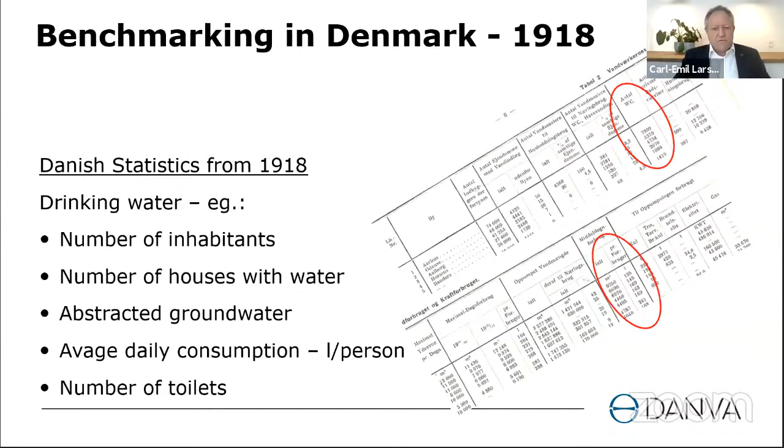We have been working with benchmarking or statistics for many years. The oldest book I have at my office is from 1918, you see a copy here. What we were interested in at that time, before I started, was number of inhabitants in the different cities, number of houses with water, abstracted groundwater, average daily consumption, and so on. But we have, of course, taken this much further since.

In 1998, the EU regulation on electricity started, and Danish energy utilities did the first pilot of benchmarking. DANVA at that time had 8 of our members start a project on benchmarking, because we were sure that if there were regulation on electricity, it was only a question of time before there would also be regulation on water.

Then in 2003, DANVA benchmarking on drinking water and wastewater made the second pilot, based on data from 2001. It was simple, using Excel sheets as a basis for this comparison. In 2004, we made the first portal and related database for the DANVA benchmarking, and we started already at that time to cooperate abroad with the Nordic countries, and we had a very strong cooperation with the Dutch Association on benchmarking, where we started the European benchmarking, which is still active and running.

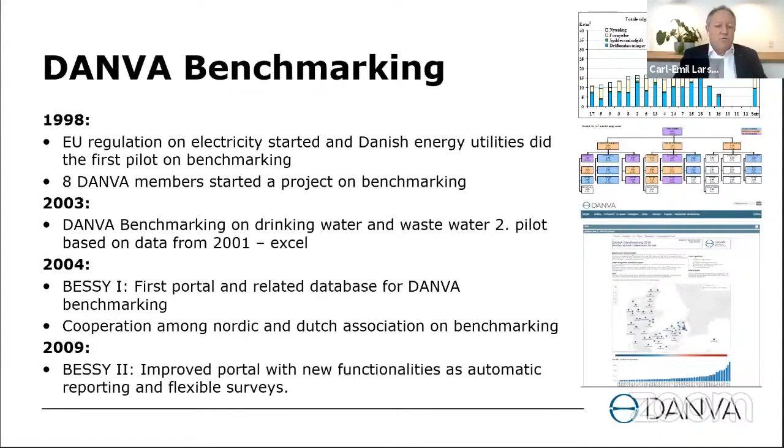Then in 2009, we made some improvements on the portal with new functionalities, and it is now improved all the time, whenever relevant.

In 2010, in relation to the regulation of the water sector, the government introduced compulsory benchmarking as well on economics. It was compulsory to attend. It started only in the first years on the operation activities, but in 2016 it also included all the investments, so this is now a total benchmarking on expenses.

And that is to require higher efficiency, economically. Then in 2018, a program on performance benchmarking was added, and it has been mandatory since 2018. That's on different environmental parameters, quality issues, and more recently also focus on energy consumption and production, and the carbon dioxide footprint is now also in place.

Related to the EU regulation, they have just agreed on the Green Deal to ensure to reduce the carbon dioxide footprint.

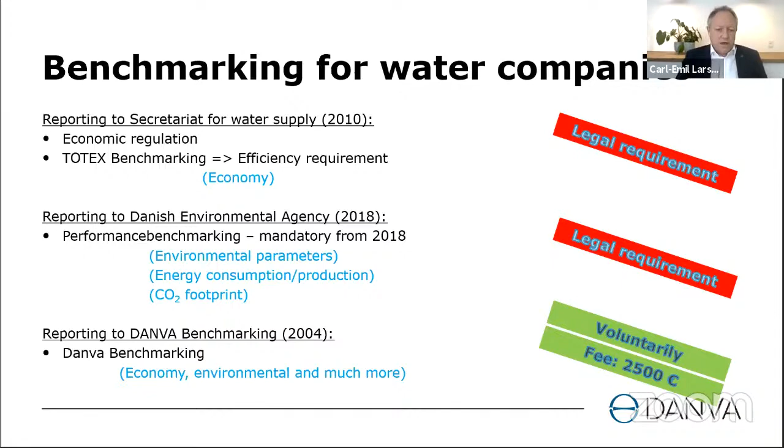And then there's the reporting to DANVA benchmark, which is voluntary. It has been working since 2004, and all our members who take part of this are paying us for doing this work, in addition to the membership fee.

So therefore, we started a bench learning workshop where utilities of the same size and with the same challenges went together and talked about how they compared their data, and almost every time there's one who is doing it a little bit better than the rest.

They analyzed how the best did the work, and during talks and during the workshop they could find the best practice among them. That means you could raise the efficiency for almost all the participants in this workshop.

So this is a very useful tool, I guess. When you have your data, you start benchmarking, you get knowledge on your sector, you start saving money because it comes quite easily, and then it results in raising the efficiency. I think that is what we see in all sectors, and in all countries, not only in the North European countries. I think if you don't do benchmark today, I'm sure you'll start within the next 10 years or something.

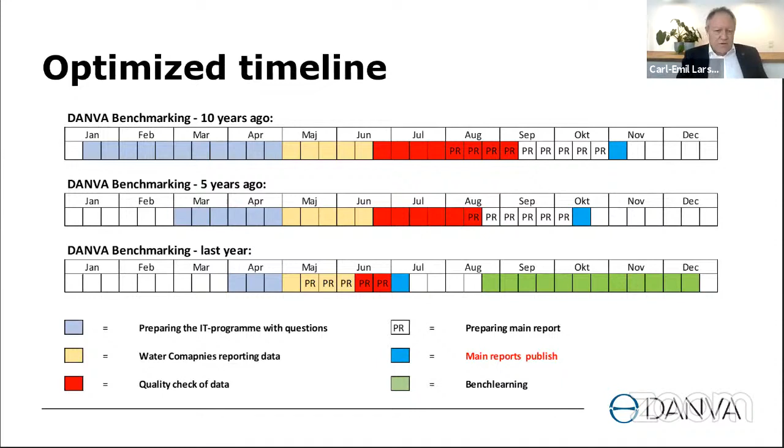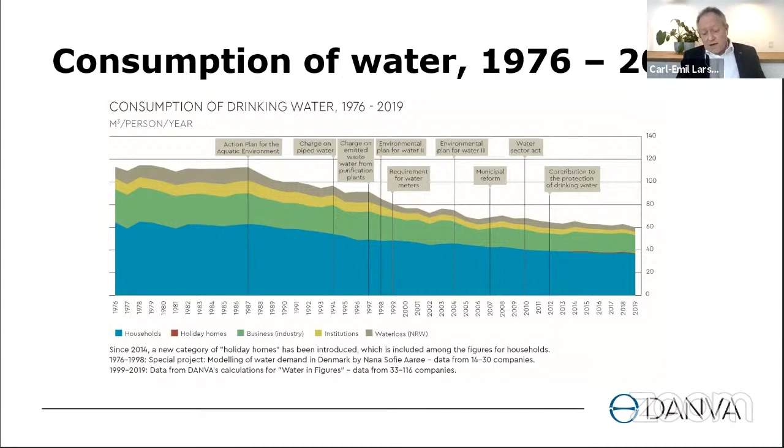One of the things I'll come back to a little bit later, but it's quite obvious that whenever you put some legislation in place, it has an effect. And I'm sure it's not only the Danes who follow what the government says - I guess most people do. Our consumption is now around 100 liters per day per inhabitant, and that is quite low.

That equals approximately 6,400 Turkish lira. So it's probably a high number compared to what you pay for water. I think Denmark has the second highest expense on water compared to global level, as a matter of fact.

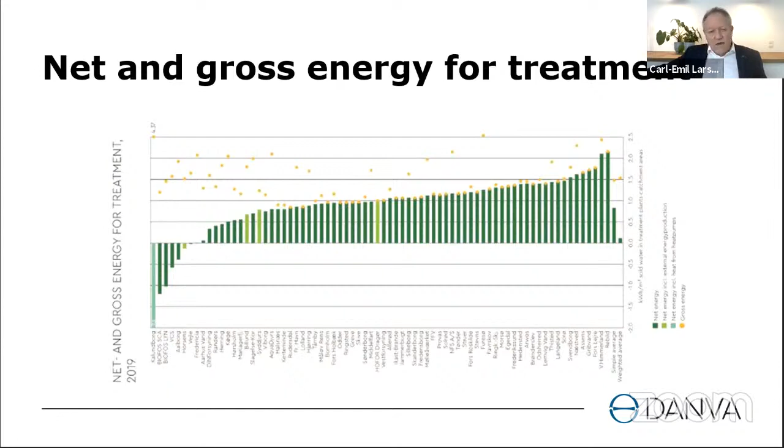They have set up targets so that the sector, step by step, will move in the direction they want, which is to be neutral on both energy and carbon dioxide.

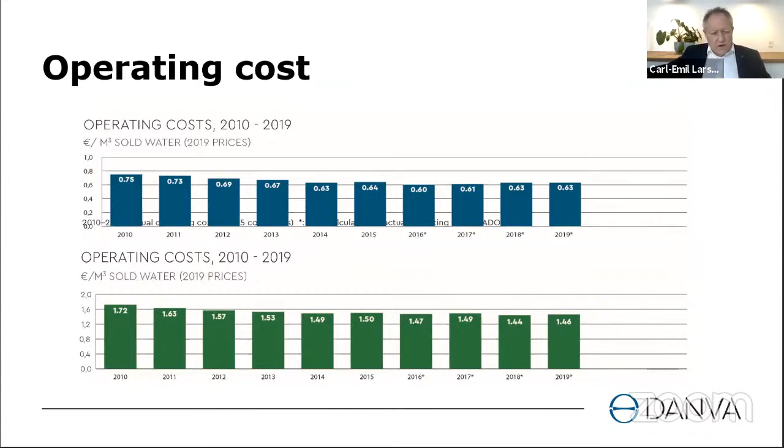And the same if you look at the bottom, that's the operating cost on wastewater. The efficiency here has also been raised a lot during this 10 year period.

And one of them is taking loans to pay for these investments. But it's fine as long as we can keep the tariffs low and even going down. So at the moment it's not a problem for any of the water companies.

Then I will tell you a little bit about the legislation. If I start with the European Union, we have a lot of different directives on water. I think there are three important ones. All this European legislation is framework legislation, so it's not detailed.

That is done in the national legislation afterwards. We have the Water Framework Directive, we have the Drinking Water Directive, where quality standards for drinking water are set, and then at the other end we have the Urban Wastewater Directive.

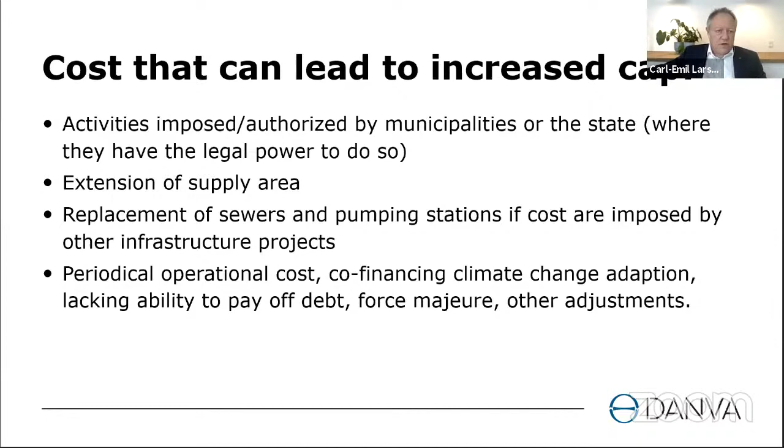The other thing I will mention is pricing in the Danish water sector, which might also be interesting for you. Looking at how the average price is composed, for an average family of 2.15 persons consuming 82.69 cubic meters, that was in 2018, it cost 69 Danish crowns. That equals 79 Turkish lira per cubic meter.

I agree with that, but we have full cost recovery and the polluter pays principle. These are two principles which are very central in national Danish legislation. For wastewater services, customers pay all the costs - investment, operational, administrative, environmental, regulatory, VAT and taxes. Everything is paid per cubic meter, and no tax grants go to the water sector. That is full cost recovery.

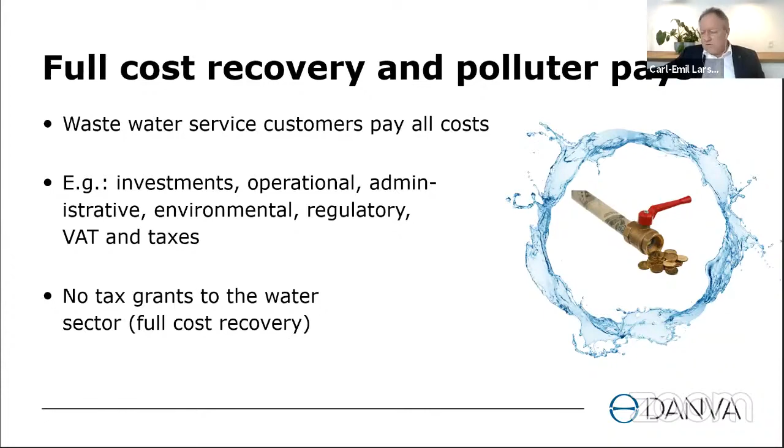It's based on metering, and it's mandatory by law that all customers - citizens, public and private enterprises and institutions - have individual drinking water meters in their properties. I'm sure you will hear a little bit more about that later. Also smart metering is now in place, I think around 60% of houses in Denmark, and in many countries abroad this has been implemented too.

The payment is calculated based on a standard price, multiplied by the number of cubic meters you consume. And also the payment for wastewater services is based on how much drinking water you consume.

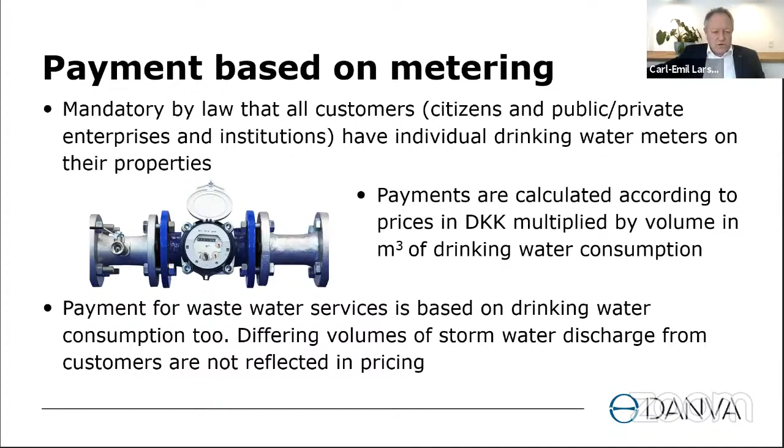On water and also on sales of goods and services generally, we add 25% VAT, and in addition wastewater is taxed with an environmental tax of about 0.75 lira per cubic meter. I think that's what's relevant in this slide.

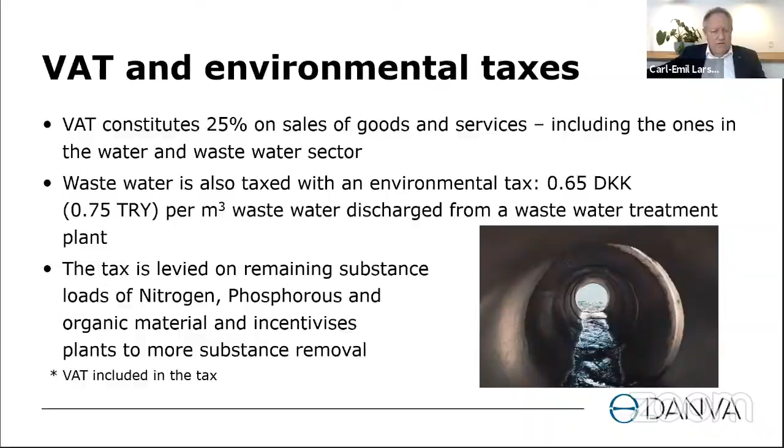Then I'll talk a little bit at the end about water losses. I'll quickly swipe through some of the slides. The water losses in Denmark, I guess I would call it, are quite low.

And I can tell you, it hasn't come by itself. All the utilities have been working very hard, and here we have used legislation, or rather a penalty, to get it as low as it is. In 1996, a penalty was introduced for water losses - if you are above 10%, you have to pay a fee to the government, and it's the water company and the consumers who pay this fee. So rather soon, it's cheaper to do some renewal and get your water loss below 10%.

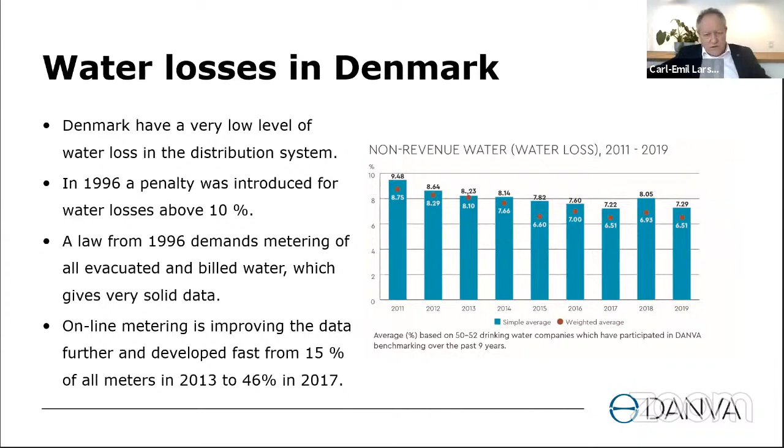At the same time, as I told you before, there was a demand on metering all evacuated and billed water, which gives us very solid data. And then online metering also is improved. In 2017, it was 46%, but I know it has risen a lot since.

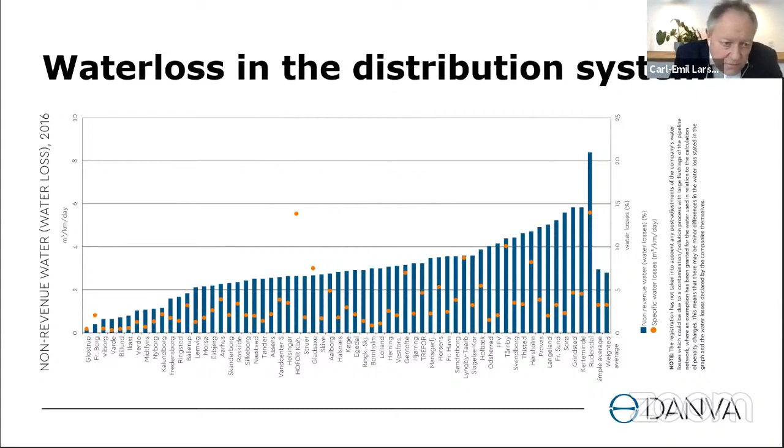Here you have a graph showing the difference between the different companies. You can see those to the right are above 10%, and they have to pay this fine to the government. There are two axes - we value it in two different ways. We can use the percentage above 10%, or the specific water loss, which is based on cubic meter per kilometer per day.

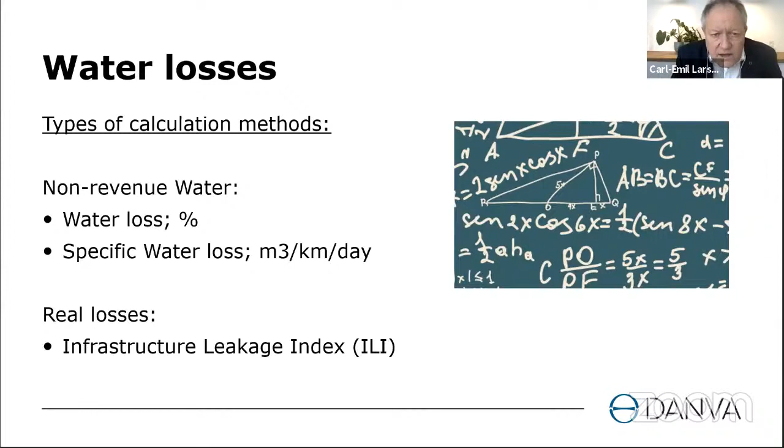Then there are real losses measured as infrastructure leakage index. I will go through this very fast because we are close to the time end. I can maybe use this one.

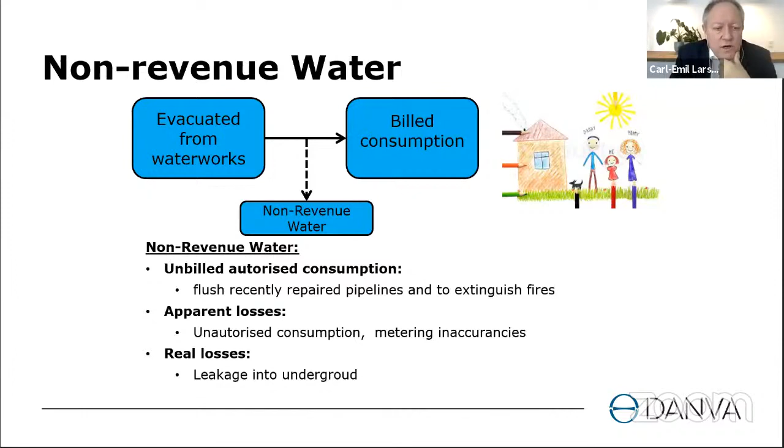What we evacuate from the waterworks and then what is billed to the consumers - the difference here is the revenue water, the non-revenue water. Non-revenue water consists of unbilled authorized consumption. It's what we can call apparent losses, that's unauthorized consumption, metering inaccuracies, and then real losses, meaning leakage into the underground.

I'll try to show the difference between the percentage and the specific loss measured by cubic meters per kilometer per day. Big water companies normally prefer water losses in percentage, and smaller ones normally like to measure or illustrate the water loss in cubic meter per kilometer per day. I'll make a tease of Flemming, who will come a little bit later.

For instance, in Aarhus, the second largest city in Denmark, they very often prefer percentage, and you can see that highlighted in dark blue. Why everyone wants to be number one is not so simple.

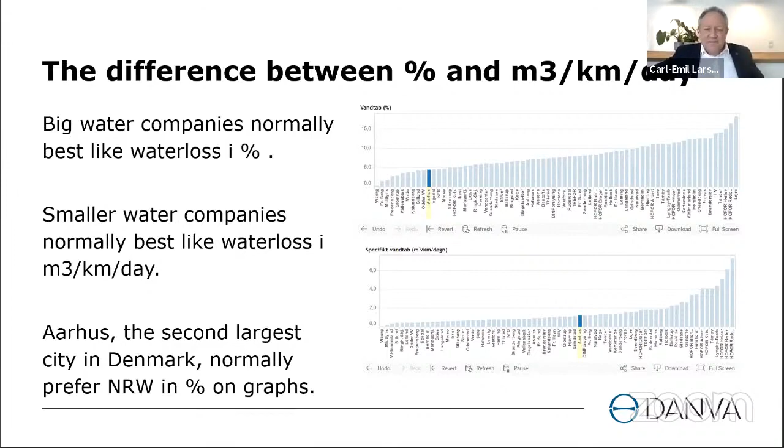It's difficult. But then we can also use the infrastructure leakage index, an international water loss performance indicator developed by the International Water Association, IWA. It compares the CARL, the actual water losses, with the unavoidable water losses, the UARL, and this fraction should be as close to one as possible. I will not go through these very theoretical things.

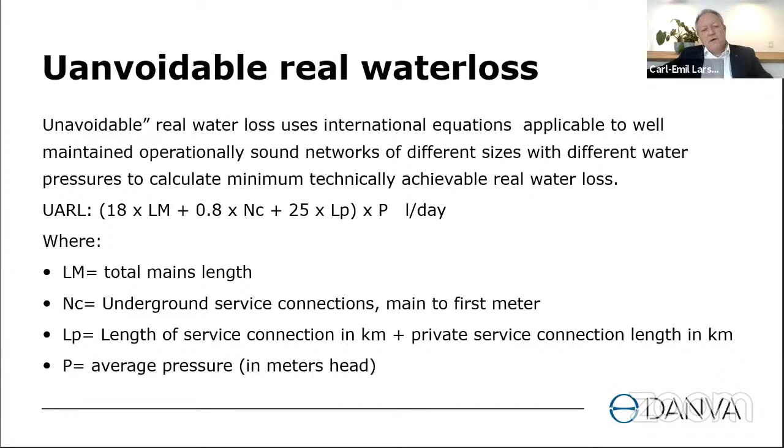I will just show you where all the Danish companies are - that's the blue at the bottom. You can see it is very low. A normal level is where all the dots are between the blue and the red line, but all the Danish companies attending this test have a very extreme low leakage. The same goes for the German and also for the Dutch companies - they are also very low in water losses.

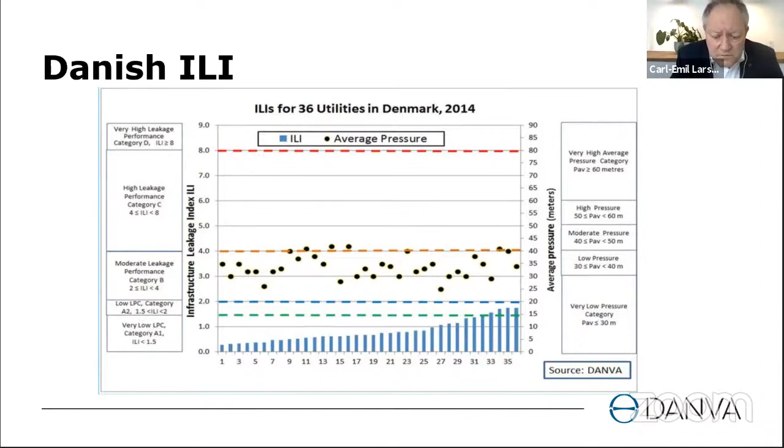If you want, you can access the Ministry of Environment in Denmark's homepage, and find a list of what has been done on water losses in my country.

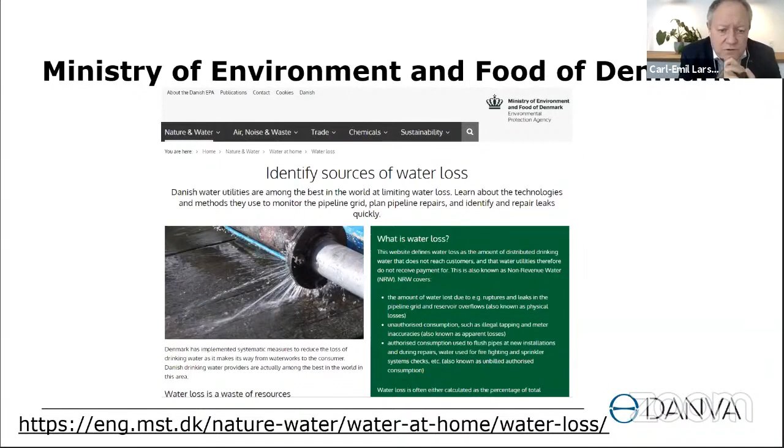Finally, I'll just invite you to Copenhagen. Denmark will host the next IWA World Water Congress. It was supposed to have been last year in October 2020, then we hoped to do it this year in May, but realistically it was not possible. So the new date is the 11th to the 15th of September 2022, and I hope to see a lot of you there. Thank you very much for your time.

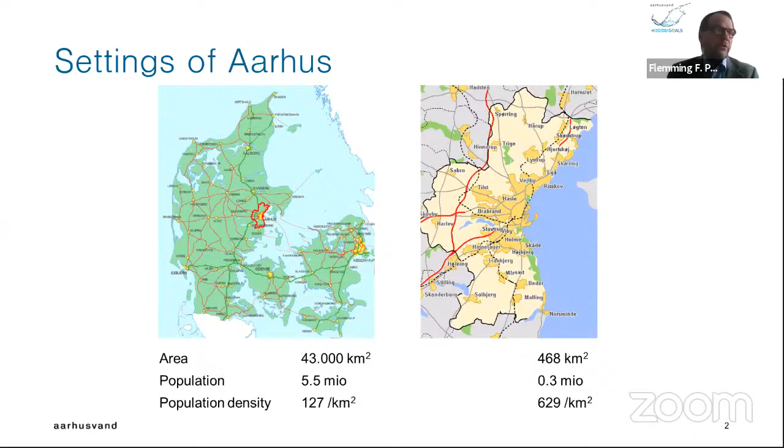In general, we consider our purpose as a utility in Aarhus as a very broad one, not only to serve the citizens of the municipality, but our purpose is to create health through the supply of clean water for the people and the planet. That is also one of the reasons that we are here today, because we would very much like to contribute globally to improve the water conditions around the world.

We will try to create a national platform for local and global solutions for a healthier water cycle, and we would like to offer and develop resource-efficient services throughout the entire water cycle.

Climate adaptation is a big issue for us. In Denmark, we are affected by climate adaptation due to more heavy rainfall and rising sea levels, so that is also one of the things that we work with as a utility. The environment is important for us, as well as supporting the Danish water sector in the export markets with the solutions that we have here in Denmark.

In general, we do not only look at drinking water, we look at the entire water cycle - from a drop of rainfall hitting the ground until it is provided as drinking water and treated as wastewater and discharged to the recipient. So we consider ourselves as operator of the entire water cycle.

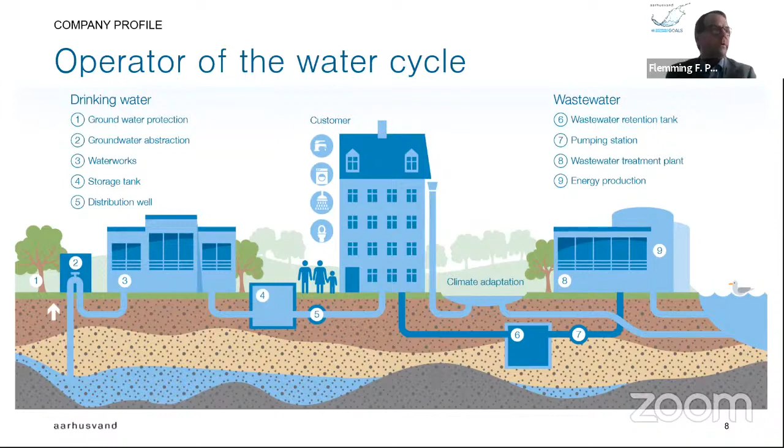Carl-Emil commented on the tariff system in Denmark, and here I'll show how it looks in our city. The consumer sees the price per cubic meter, calculated here as 55 Danish kroner per cubic meter consumed. This water tariff covers both drinking water supply and the discharge and treatment of sewage water. So every time you pay for 1 cubic meter, which accounts for most of Denmark, you pay both for the drinking water and the sewage water system. We also have a lot of taxes on the water price, which is also part of the tariff the consumer pays per cubic meter.

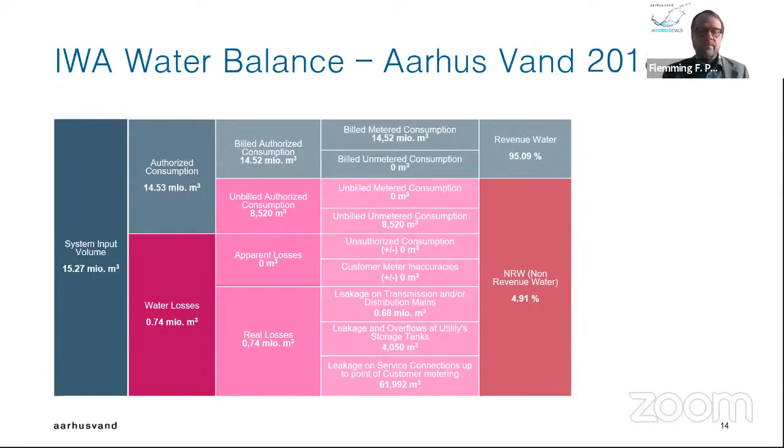When you work with water loss reduction, there's a number of issues you need to consider. In this presentation and the next, we'll look into some of these. My colleague Sally will talk about operation and maintenance and information data, and I will show you a little about asset management in the coming slides.

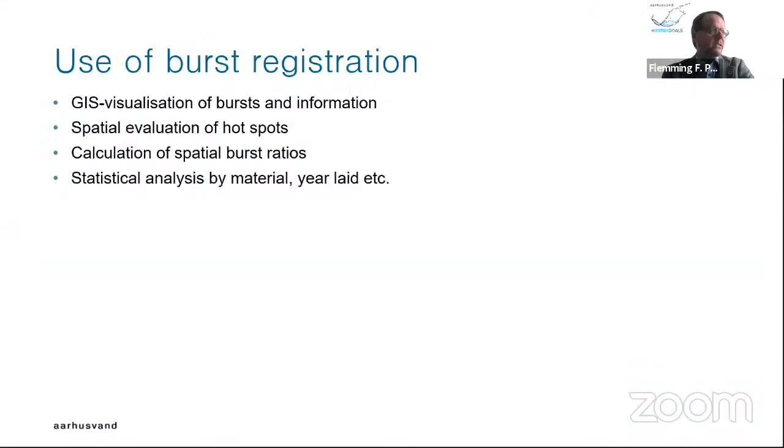One important thing for asset management of the pipeline system is having good data. In our case, we have a pipeline registration of the entire system, and we also register bursts in the pipeline system. So we know where we have the largest number of bursts and leaks. We have a history of that, and we can focus our efforts on reducing water loss in those parts of the city with the highest burst and leak ratio.

We also know it by the pipeline material. For instance, we know we have old cast iron pipes with quite high burst frequency. So one thing we're looking into for renewal of the system is replacing these old cast iron pipes, because that is where we have many of the leaks.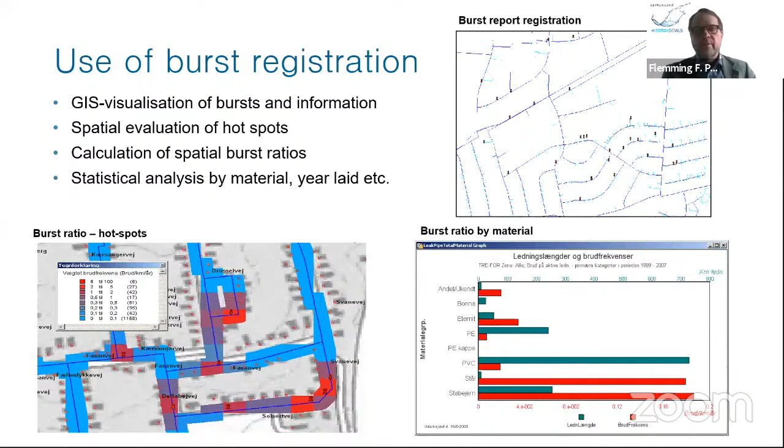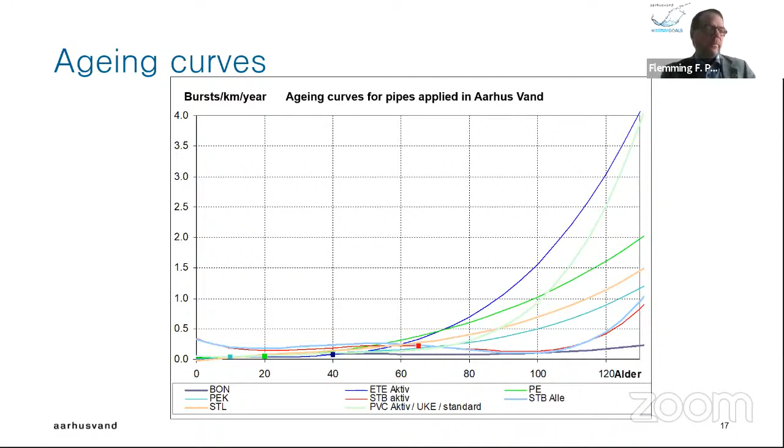We've been mapping different kinds of pipe material and how burst frequency increases as they get older. For instance, this blue line represents asbestos cement pipelines, and we see they have quite high burst frequency once they get older than 60 years. So we know that with that kind of pipeline material, we need to look into renewing it.

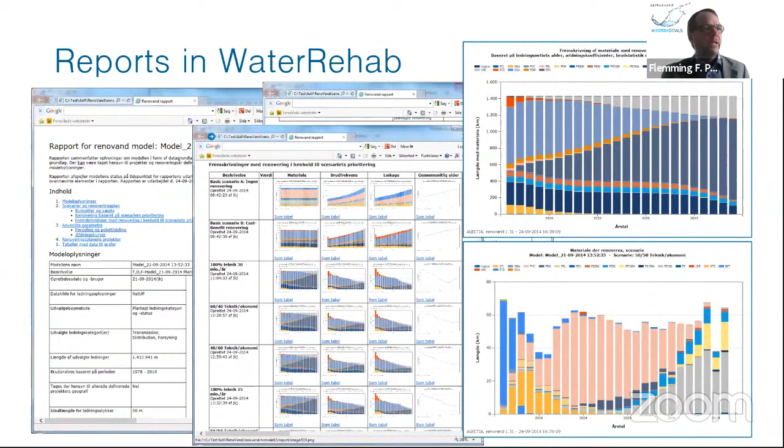We have a system in place for asset management of all these kinds of pipes, so we can generate reports telling us when a certain part of the pipeline system needs to be rehabilitated or renovated. There are a number of different views of this. Here is one view showing in which year expected rehabilitation of a certain part of the system should be done, so we can plan many years ahead where to make the most efficient investments.

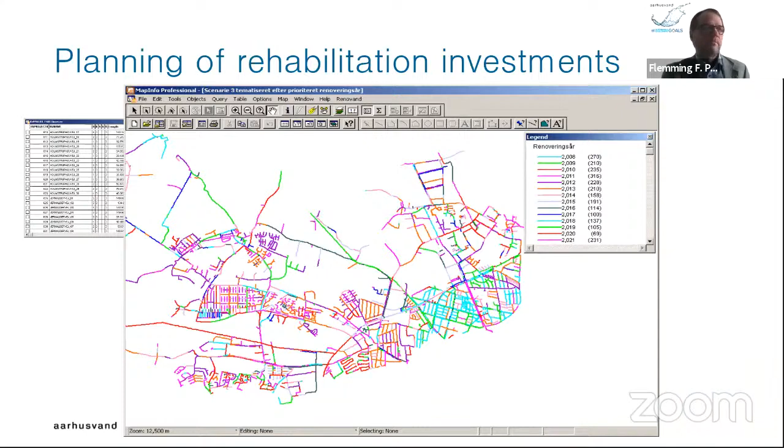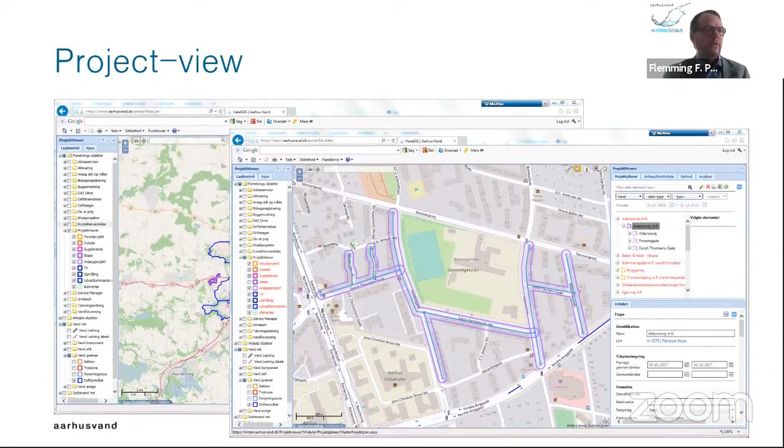There are also different maps for prioritization based on the kinds of materials in the pipeline system, so we can see that if we do nothing, we can expect a higher leakage rate for certain pipeline materials. We also have a project view, so we know in which parts of the city we have ongoing rehabilitation projects, making it easy to communicate to colleagues what rehabilitation projects we have going on in our utility.

So that was my presentation. Thank you for your attention.

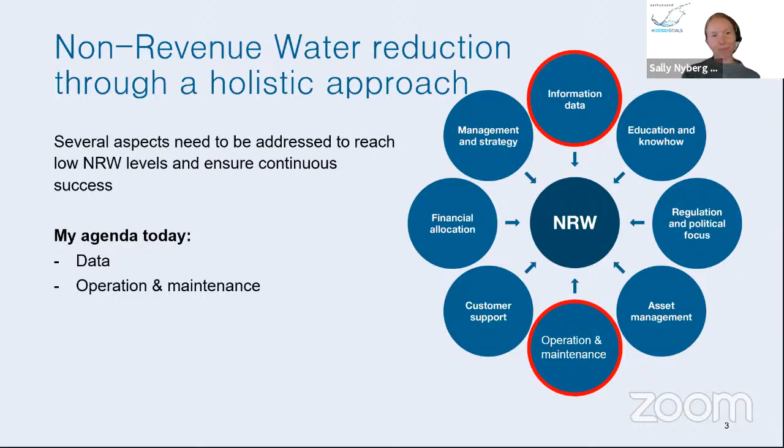One of the key pieces of data we need is the SCADA data from our waterworks - how much water we produce, how much water leaves the waterworks, and also the storage tanks. As Flemming told you, we have storage tanks both at waterworks and around in the systems, so information from those points is very important.

We've also talked about water consumption. The most important parts of the calculation are how much water we give the consumers, what is spent at the consumers, and what's left is the water loss, the non-revenue water. Right now we have a strategy in Aarhus Vand to change our manually read water meters into smart meters over the next years.

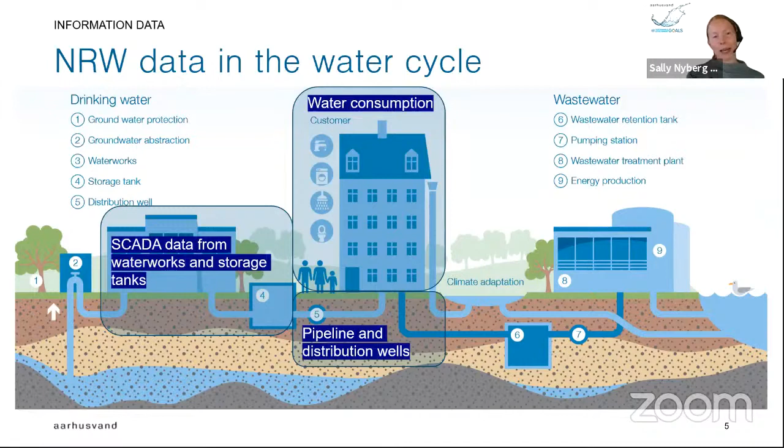We have something called distribution wells, and I'll introduce what I mean by that. These are measuring points around our pipeline system, measuring water going into smaller parts of the network called DMAs. So important data here is the SCADA data from the DMAs.

We also have that structure in Aarhus Vand where we have bigger zones - the big DMAs - which are then divided into sections, sub-districts inside the big DMA. We have a strategy about DMAs, and right now we're having more and more of them.

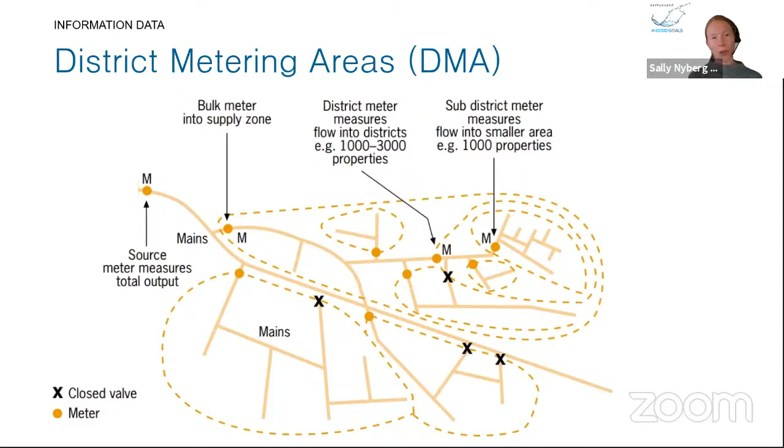I'll show you a picture of a measuring point going into a DMA - this is what we call the well. Here we have a picture where the top is a manhole, and inside the box we have the measurements.

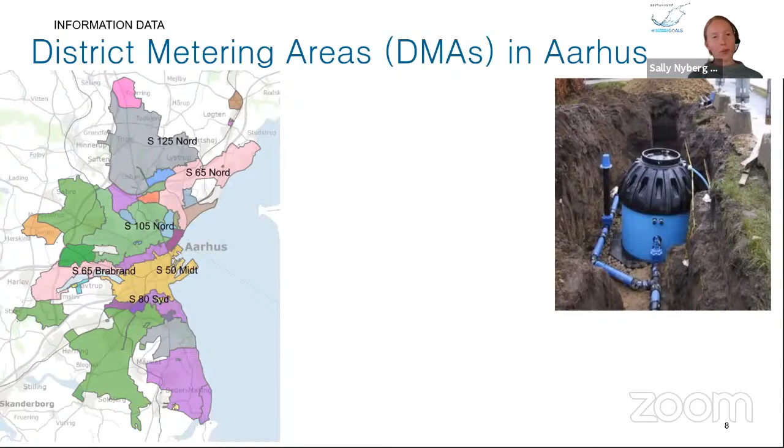Right now this is the picture of sections in Aarhus Vand where we can calculate water going into the area, and also water leaving the area if that's the case. In some years the plan is that it will look like this - an ongoing process where more and more smaller parts of Aarhus will be able to calculate exactly what water comes into the area.

So what do we calculate at these measuring points? We calculate flow, pressure, and temperature. There are also other features and components - for instance, we can take water samples and so on. It's very important for our daily operation that we have these measuring points with online information coming into our SCADA system all the time.

Another important data type, talking of non-revenue water, is pipeline registration. This is important because we need to know information about the pipelines - we have a lot of information decided in Denmark that we want to know about our pipelines. Another aspect is to investigate how precise our data is. For instance, when doing leakage monitoring, it's necessary to know how much I can trust the data - is it plus minus 20 centimeters on the map, or plus minus 5 meters? It's important when locating the exact leakage, so that's something to be taken into consideration.

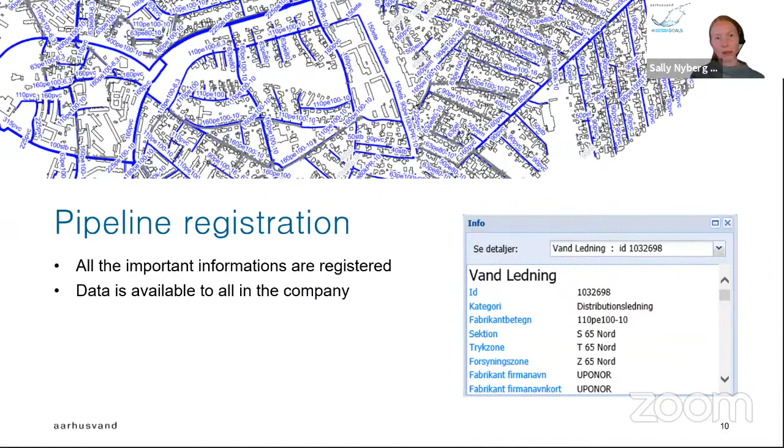The last thing about data I will share is that in Aarhus Vand we have developed a software where we can visualize different kinds of data, and we use this software to have some kind of data flow. I'll show you a print screen from the software. The idea is that everybody in Aarhus Vand has access to it, including access in the field. So here on the top you see a map, and on the map you can see the pipeline registration.

You can also see work orders if they are here, so on the right there is a specification of the work order - of course it's in Danish. But the idea is that we have this tool where everybody in the company can see the same information.

And on the bottom you can see two pictures, because the field workers can directly take pictures. They can also make small videos and audio calls, so they can put information very quickly into this program, the software, and then we know in the office what is happening. My job is very much based on analyzing what is happening, what has happened for the last month, and I also use the same tool.

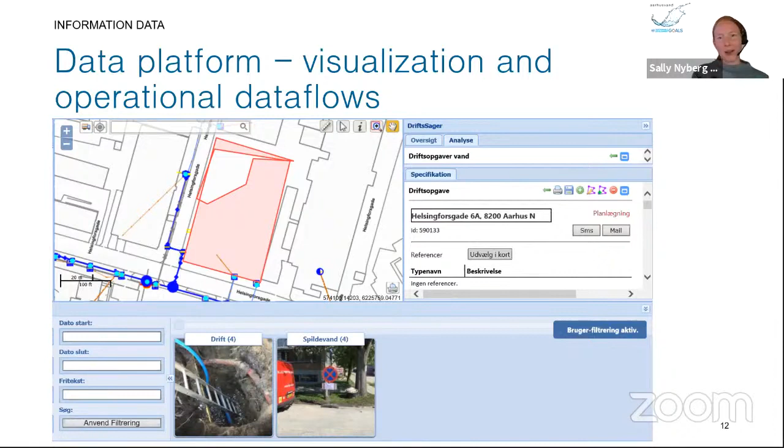Also, one of the last slides Flemming had was that the planning and the renewal projects of the pipeline are also visible in the same platform. This was just to show you how it is very efficient for us to collect data and see it all together. For the data flow, I'll go into more detail with the work order flow for the next part of my presentation.

It will be about operation and maintenance. As I told you in the beginning, we have this group of people that I'm leading, where we are both focusing on monitoring water loss and also leakage detection. The monitoring part and the leakage detection are linked very much together. But before I go into detail with those two parts, I would like to show you how we are organized, and how a normal work order flows between the different parts.

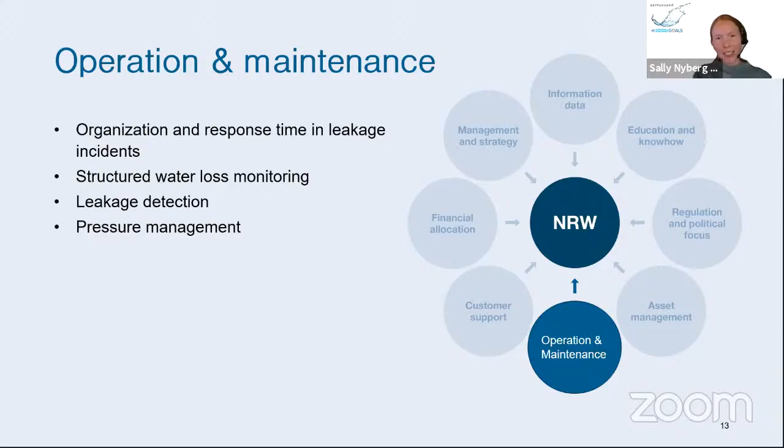So just to introduce this part, I will repeat our structure here in Aarhus Vand. I'll show you a line called operation, where I am, where my role is, and also service will have a very essential part here. I'll also show a line at the bottom called planning - that is the part of Aarhus Vand where the plans, the last thing Flemming showed you, will be carried out. They are very eager to have the right information from us, so that's why they are also part of the flow of the data.

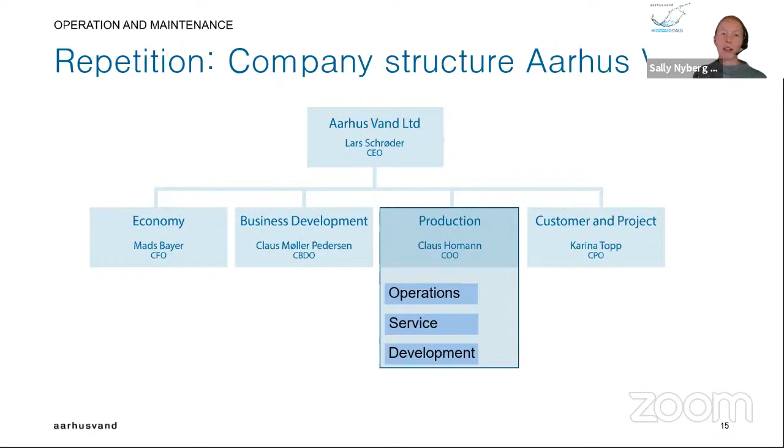I'll go into detail with this part as well, the workflows. As you can see on the top, I have put operation, and this is where my role is. This is a workflow from a typical leakage or burst - how does the data from this incident go through our organization? It starts in operation, where it might be a leakage I discover in our monitoring software. We have a software called KeyZones that I'm looking into almost daily. It can also begin with a call from a customer or other that finds a spot in our area with water on the ground - then the call will also come into operation in our team.

Then the next step will be to make a work order. The work order will go from our team into our service team, where the field workers will receive it and go out and locate the burst, using one of the methods I'm showing you in some slides. When they have fulfilled the job in the work order, there might be a false alarm closing it, saying there is no leakage, but often they actually find a burst or a leak, and then it would make a work order number two, going directly into another part of service where they're doing the pipe repair, also going down to our constructor - we have a constructor that does the digging, another company we work together with in partnership.

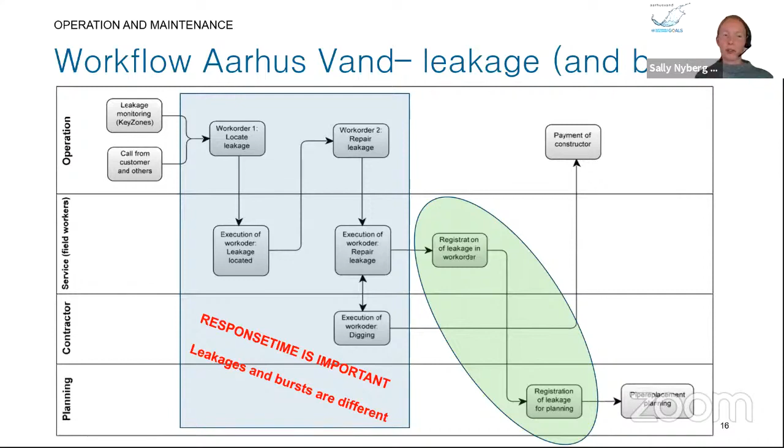The end of the workflow is about registration of the incident, registration of the exact burst, the material, the water flow out of the burst and so on. This goes directly to planning, because they use it for pipe replacement planning. I'm about to start a project this year to look into this part of the workflow, to optimize it and make it smoother and less manual than it is now. So we're always looking into where we can make it better.

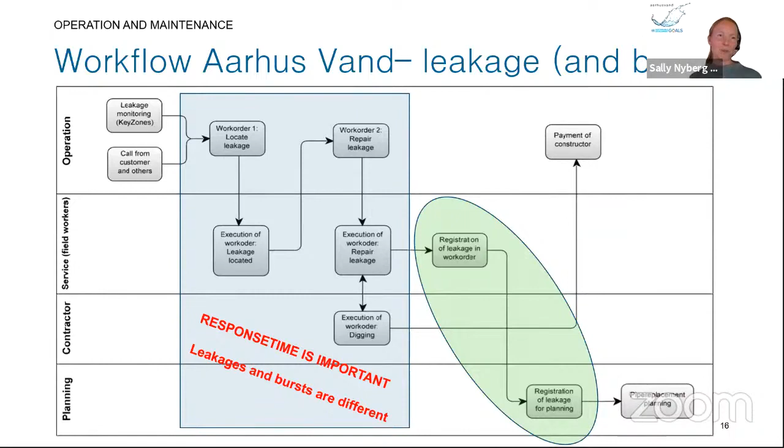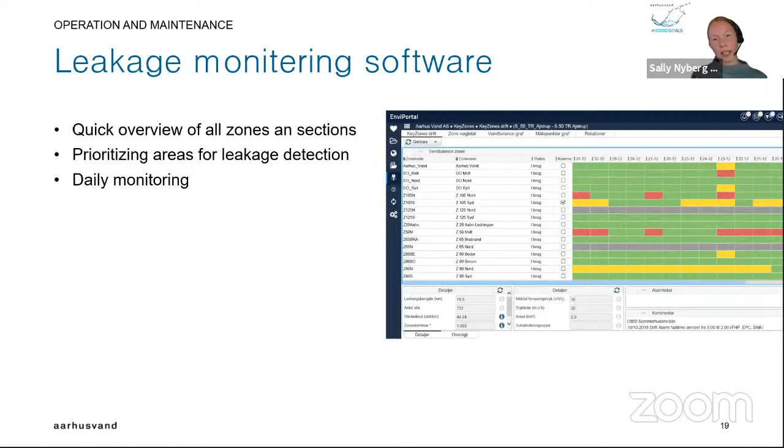We then decided to invest in monitoring software. The idea is that while we could see the bursts and changes directly from our SCADA system, the monitoring software gives us a quicker overview of our zones and sections, the DMAs. There are many different ones on the market, but here the idea is that the colors give us an idea of where to look. Green indicates everything is fine, red and yellow indicate we should look into it. It's the same principle as directly in our SCADA system, where we have a change in flow curves.

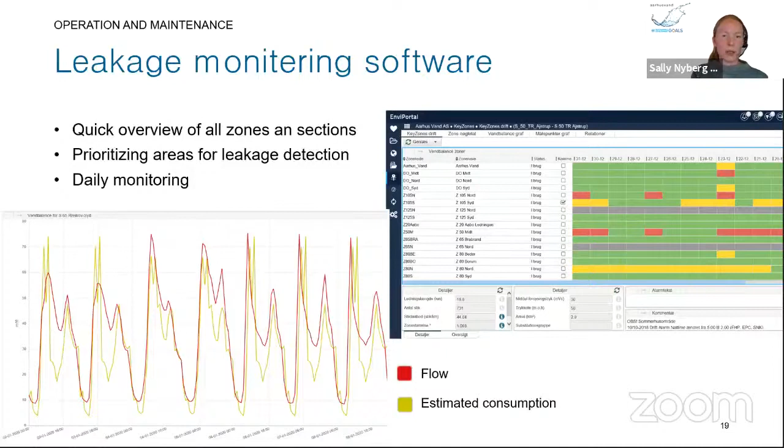You can see here the red one is flow, and the yellow is estimated consumption. Yes, leakage detection.

It's used the way that we divide a small area, close the inlet to the area, and then provide water from this tank into the area. Then we can measure exactly how much water is spent in the area. The idea is that the area should be small enough that we come down to zero consumption once in a while, meaning there are no leakages.

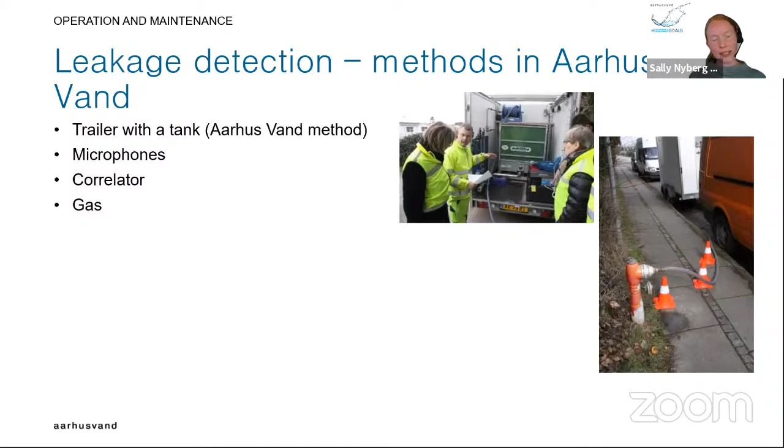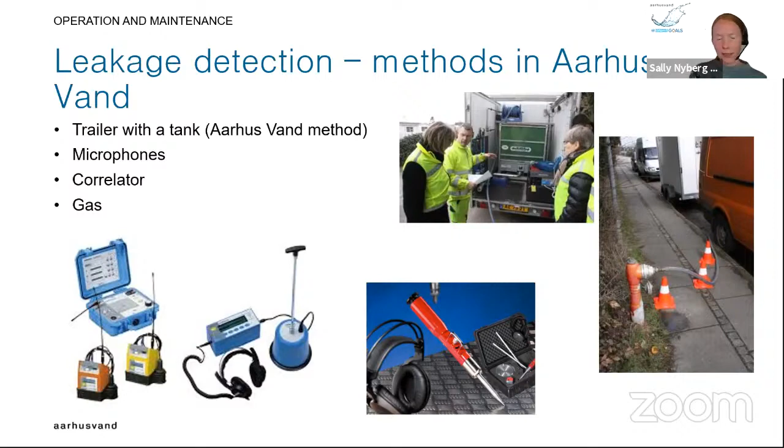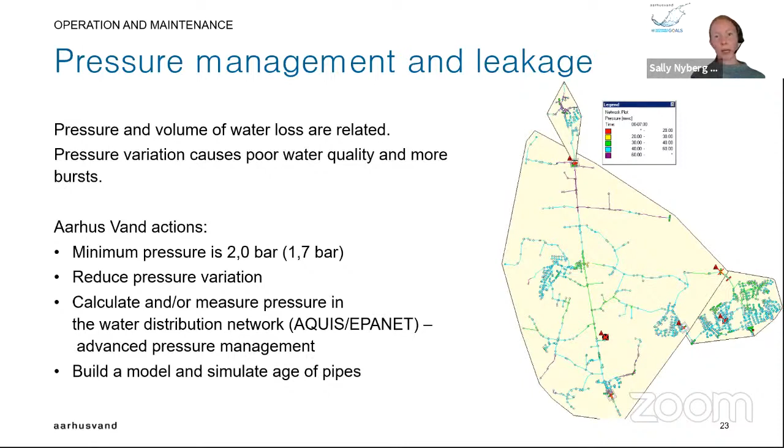That was the most important part I think I've chosen. So thank you for listening, and of course any questions, just let me know.

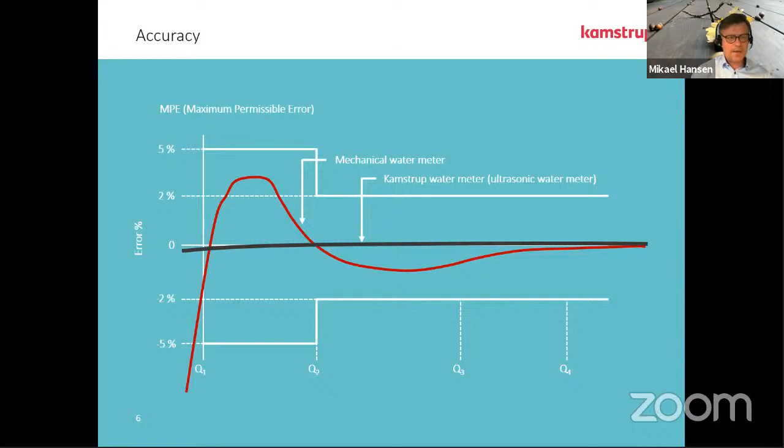When we speak about smart metering, you hear it all the time. You can say smart metering is the meter itself in a more or less digital version. We've seen meters based on traditional technology with a communication unit added. Kamstrup has a full digital meter, ultrasonic based, with data communication from there. So there are various levels of smartness, so to speak.

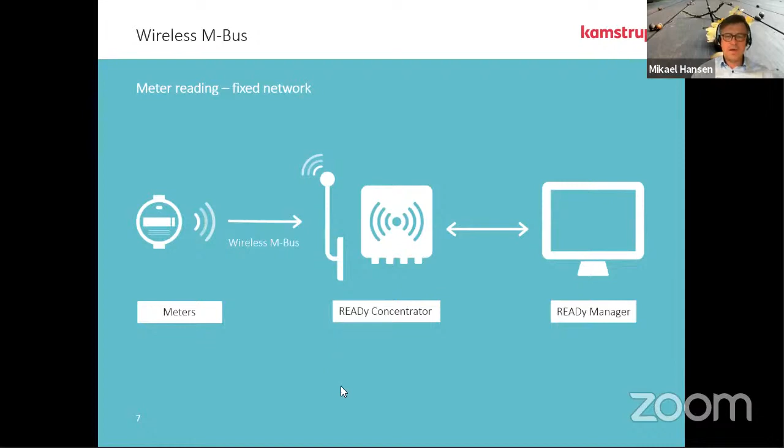I would like to introduce you to a specific project we did. We started 4 years back, and it was one of the first full-scale, full digital systems we supplied in Denmark, for a client called Herning Vand, a medium-sized utility. The project involved supply of 17,000 meters, primarily for residential applications. It was a fixed network, including the data communication infrastructure. Water balance software was part of it, and also project management was part of the supply scope. So it was a full turnkey project that was part of the partnership.

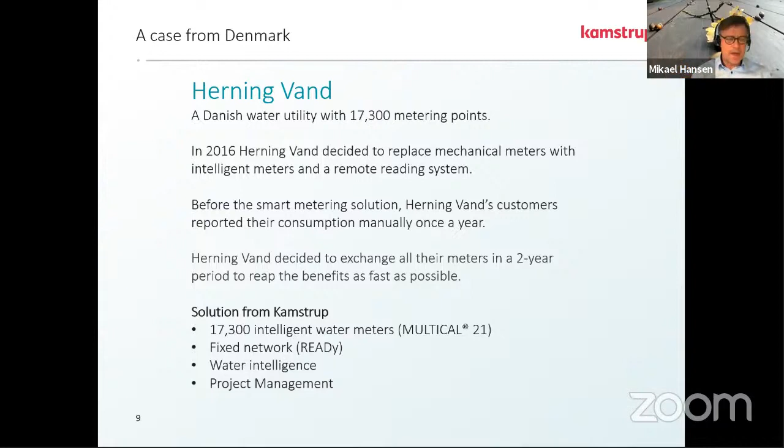Having been in operation for 2 years, the utility was looking back at what gains they got out of it money-wise. They were able to say that the savings were 340,000 euros, plus an initial savings of 142,000 euros. Maybe more important, it gives a hint of 6 years return on investment.

The values created include increased revenue because of better accuracy, increased service towards the customers, simply because more information could be conveyed to the consumer, so a more positive dialogue with the consumers. Also optimization on the administration as well as assets management.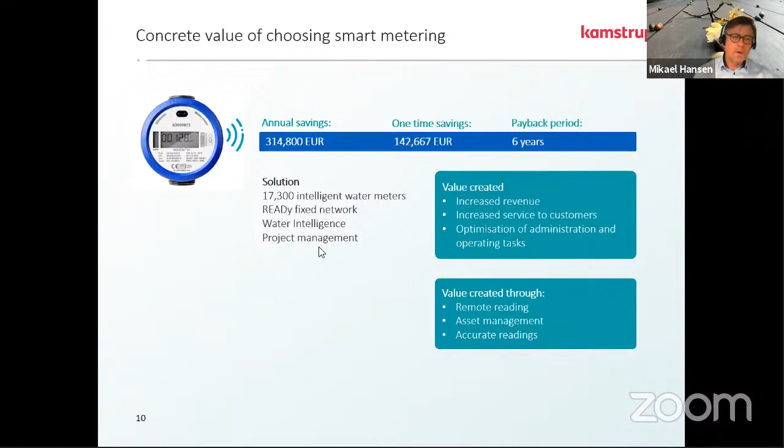To go a bit deeper, one aspect was the remote reading itself, the physical action or handling of manual reads. Reading in Denmark is done, I don't think anywhere else in the world, by a self-reading process. But even doing it like that, there are still tasks involved which are costly. In addition, one thing seen very positively at the utility was that the quality of the data accelerated, allowing them not to spend time cleaning up data, but to do more key-oriented work.

So the savings out of the reads itself were 64,000 euros, and the improvement of data quality helped them save another 38,000. So 102,000 euros on a yearly basis.

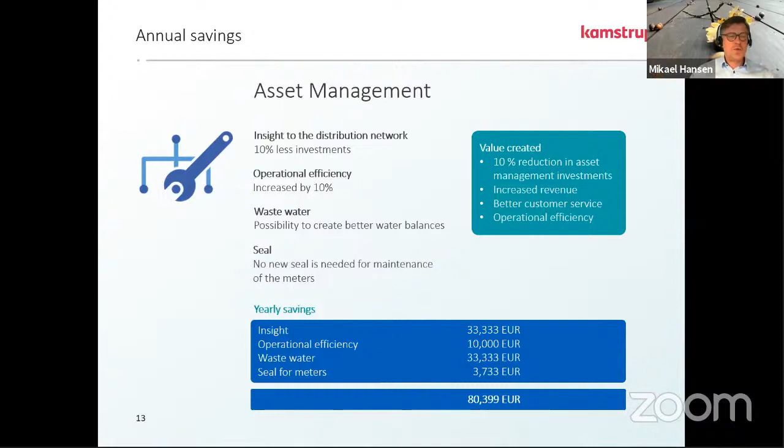Similarly, another 10% gain was achieved on the operational side, in daily operation, with less pipe issues and more efficient energy use. Accurate readings was one factor giving a relatively high number.

And finally, a one-time saving was on the fraud side. When the smart metering solution was put in force, a number of frauds was detected, whether people handling around with the meters, or even bypass installations. People are always very creative when it comes to fraud, but at least they were able to find value of 100,000 euros in frauds that they could stop, and hopefully it won't happen again.

So these were all gains for the benefit of the utility. On top of that, there are also benefits for the consumer.

One very specific thing is frost, meters that were damaged due to frost, which can still happen today. They got an alarm because the meter doesn't react any longer, giving a clear signal something is happening there, so they were able to repair it in due time before losing water.

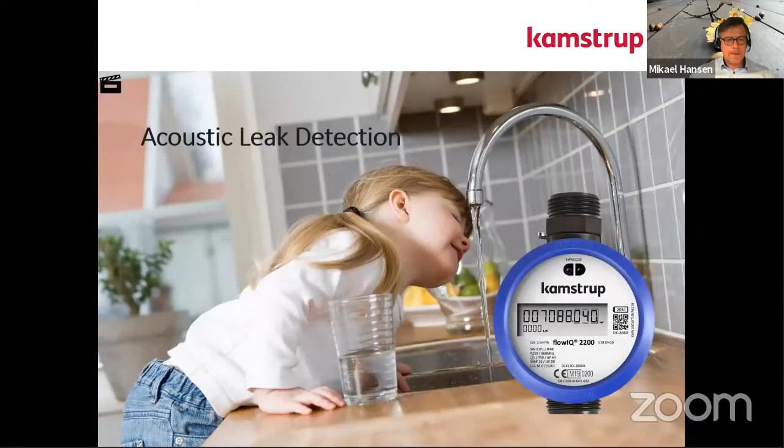A little bit of inspiration here. So what we were thinking about was taking a view on a typical distribution or split of leakage seen in a water utility, and these numbers here would represent a typical North European picture. It might be different in Turkey, and definitely also in your part of the world. It's very individual from area to area, from utility size, etc. So just take it as an inspiration.

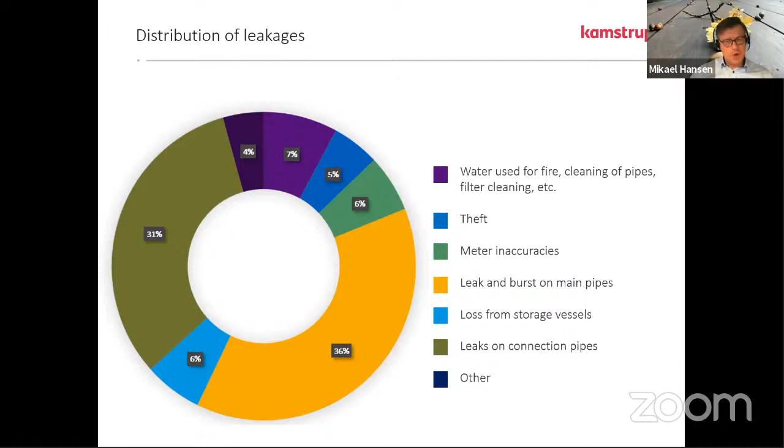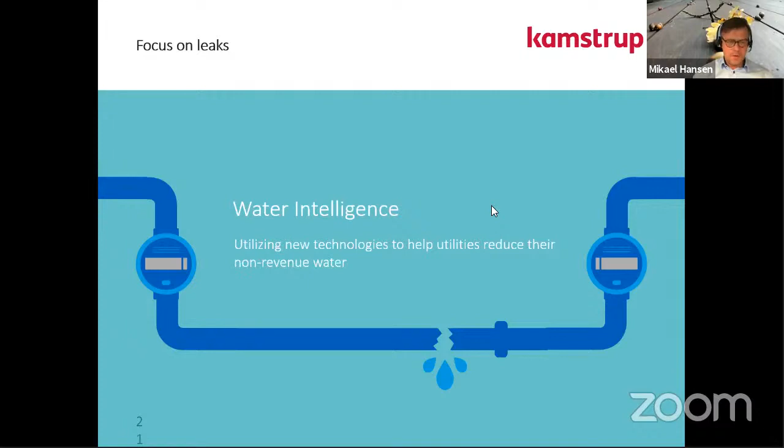But we realized that 31% of the leakage, or the non-revenue water if you like, is to be found in the connection pipe - from the distribution network into the meter installation, or the connection to the consumer. So we thought that would be worthwhile having a look at. If we were able to detect or get a message on an irregularity in the connection pipe, that would have huge value for the utility.

So what we did, we took our existing meter and we added a noise sensor, or noise sensing functionality, into the meter. Basically, the meter is busy primarily with metering, but when it is not doing metering, then it can do the noise signalizing. So we put that into the meter.

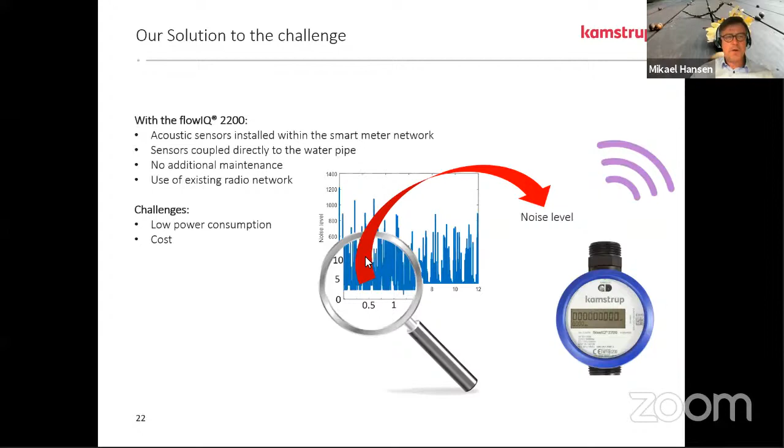We made a software, an algorithm, which is the way to understand the data from the meter and illustrate to the operator the situation. It's a bit like the data doesn't have value itself, but at the moment where you're able to understand it and present it by help of algorithms and presentation material, it becomes valuable, and action can be taken out of that.

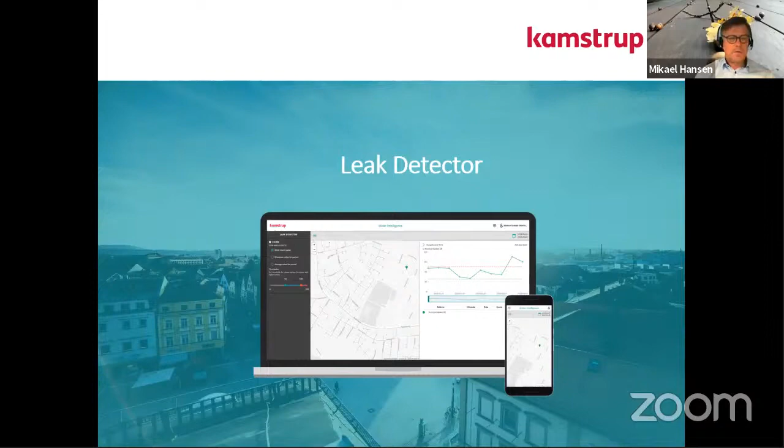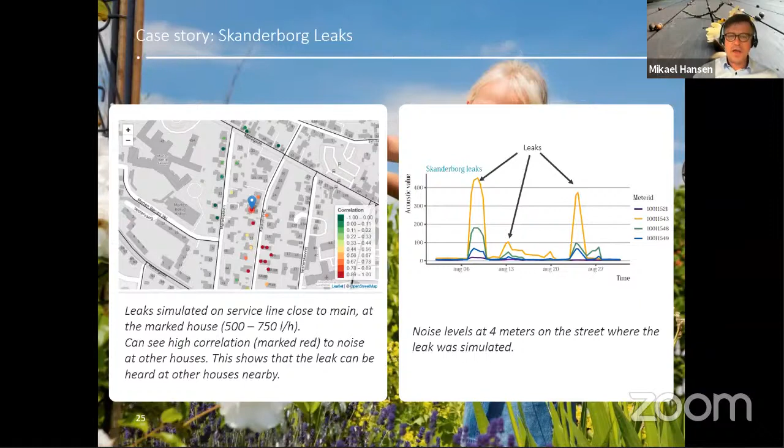Another example we got was we had one leakage here, but actually we had 3 meters able to monitor that leakage. The yellow one here is indicating where the leakage is - it's a close by meter - but we actually had 2 other neighboring meters also able to detect the leakage, but in a weaker way. So these were all things that we needed to understand better and bring into our algorithm, and then eventually put forward in the program.

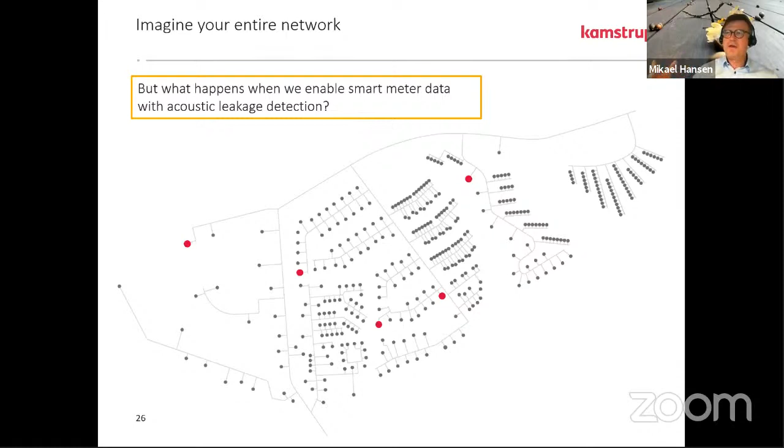So if you have a pipe network, let's say you have leakage in those areas, or put another way, you have noise indications that noise is registered in those areas. You can monitor, get closer into it in your software, and you will be able to see for each and every single installation how the noise measurement is done, and the results of the noise monitored.

Maybe I should say here, the noise is seen as an average or lowest one over 24 hours, and typically that would be in the nighttime, equal to what Sally was saying. Also, nighttime is where it's important, because here you won't have too much additional noise - could be pumps, could be other external factors that have an influence. But in nighttime, things normally are more quiet and thereby more stable.

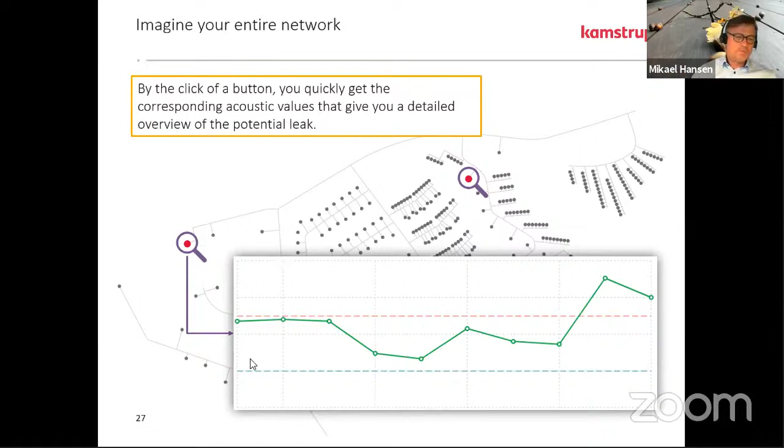All right, so the output is that you have data from each and every single installation. You will not necessarily have leak information, but at least a leak indication that there could be a leakage.

And you can start to prioritize your work. You can analyze data for a quicker assessment of the situation, fixing things in a quicker way, and maybe even more important, asset management, because it really helps that you have a monitoring system telling you that maybe in the east you don't really see issues, but in the west part of the city, maybe you see a lot more leakage reports, which could be an indicator of where you should spend your money when repairing your pipe network next time.

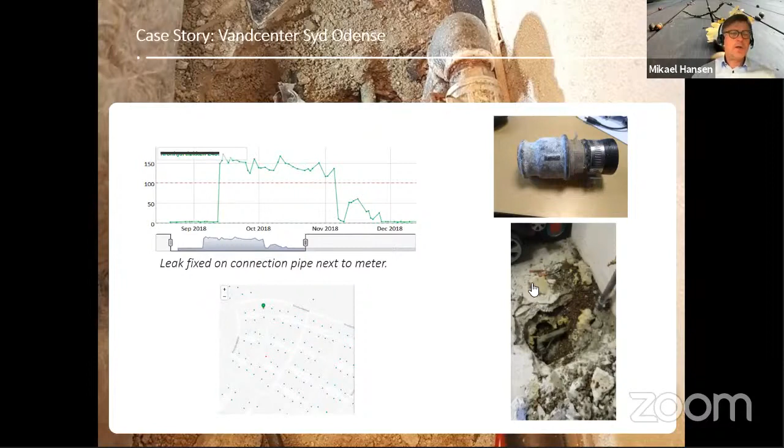Just to say, this is just an example of one leakage that was found on a connection junction. I'm giving you a couple of examples here. This one was actually an iron pipe that was leaking. You see that one here. We had the leakage, and it was found because of the signal indicated.